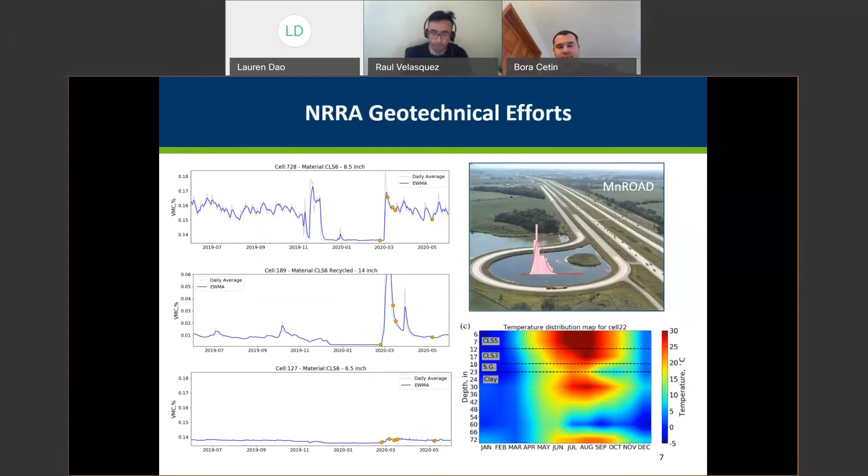So what is the motivation for this study?

The motivation of the study was mainly to improve and refine design guidelines and specifications related to recycled concrete aggregate and recycled asphalt pavements, refining the specifications related to recycled aggregate bases, and to test and monitor the performance of recycled aggregate bases under unique environmental conditions at MnROAD.

By unique environmental conditions, we mean these materials are subjected, as you know if you live in this region, to extreme fluctuations of temperature that can provide significant information in terms of performance. It's also subjected to not just big changes in temperature, but also freeze-thaw cycles. And very importantly, we have a very shallow water table at this facility, which creates complex moisture distribution inside your pavement foundation. So that's a unique set of conditions for studying materials such as these recycled bases.

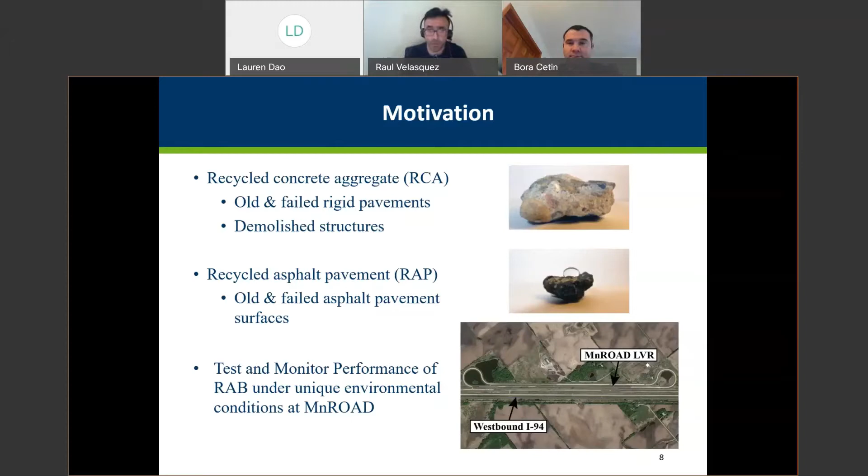The research team did a significant literature review and found there was limited information about field performance of these materials, and limited information about how to properly mix recycled concrete aggregate and RAP. That was an additional motivation to perform this study. There was inconsistent design methods and construction specifications related to recycled aggregate bases, and a lack of information available for design inputs.

Another important outcome from this work is the prediction of mechanistic-based parameters for design purposes based on simple experiments. Bora is going to talk a little bit more about that, how to predict stiffness based on simple testing. That's one of the outcomes from this project.

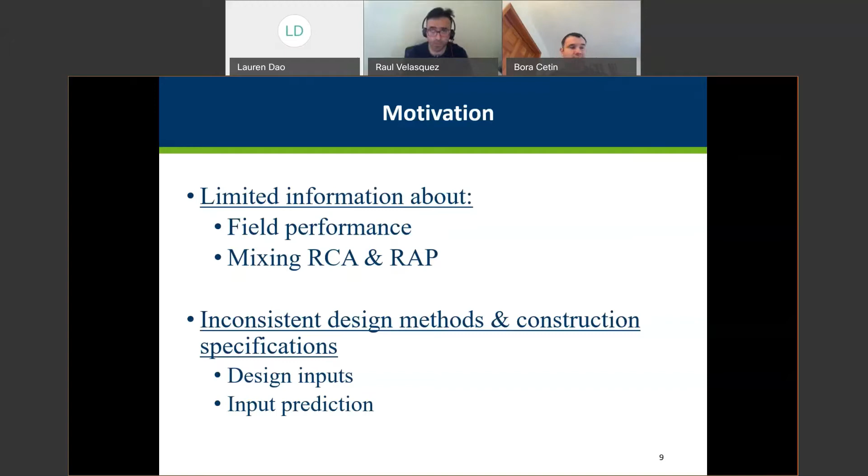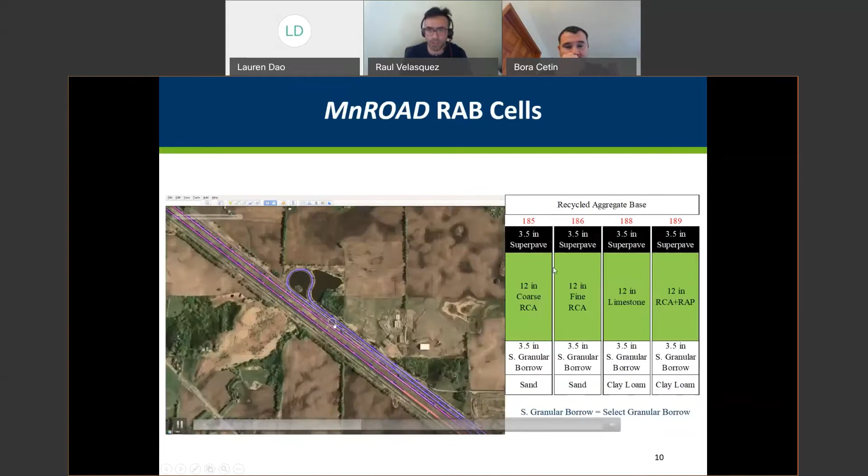So what are the MnROAD recycled aggregate base cells? Our cells are 185, 186, 188, and 189. The cells are located in the low volume road loop on the west side. 185 and 186 are founded on sand subgrade. 188 and 189 are founded on clay loam subgrade. So keep that in mind.

In terms of thicknesses, they're all the same. The top material is the same: a 3.5-inch Superpave mix design, 12.5 maximum aggregate size mix. 185 and 186 are the recycled concrete aggregate bases, one coarse material, 186 finer. 188 is the control section with limestone aggregate. And 189 is a mix of recycled concrete aggregate and RAP. We can talk more about the performance and the approximate ratio of these two materials later in the presentation.

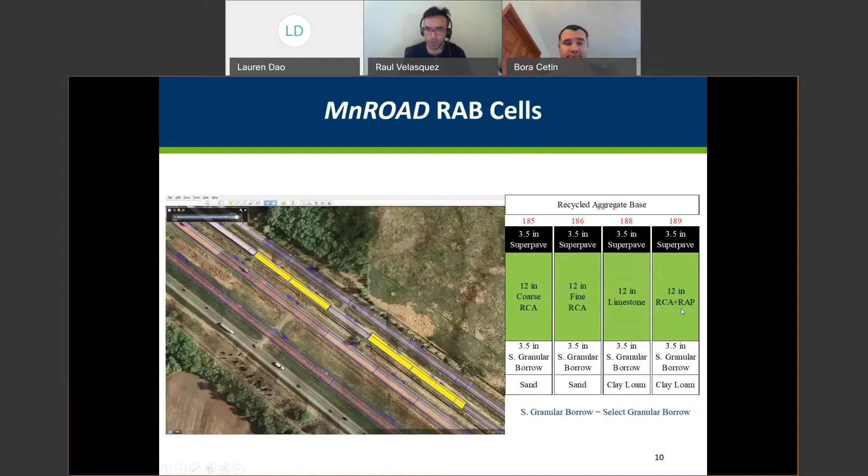Thank you, Raul. So thank you again, everybody, for being here. These are the nine different materials that we tested for the recycled base test sections at MnROAD that Raul just mentioned.

Again, we had a sand subgrade underneath coarse RCA and fine RCA test sections, and clay subgrade, clay loam, on the RCA-RAP mixture base and the limestone base. We have a select Granular Borrow material on the top, right above the sand and clay subgrades. And here are some pictures of the coarse RCA, fine RCA, RCA-RAP mixtures, and limestone.

One thing we also wanted to touch base with is the Class 6 aggregates and Class 5Q aggregates that are used as a base on top of another large stone subbase section. We're not going to cover those here, but we'd like to discuss those materials' characteristics in this presentation and how their performance compares to recycled bases.

Here is the limestone, as you can see, a very fresh crushed aggregate from the quarry. Class 6 and Class 5Q aggregates are basically a mix of RCA and RAP materials. As you can see from the figure on the bottom left, the Class 6 aggregate is very dark, and you can even see the black dot particles there - those are basically RAP materials. Class 6 aggregate actually had even more RAP material than RCA-RAP mixtures, based on one of the RAP binder content measurements. On the other hand, Class 5Q aggregate at the bottom of the picture is very whitish, similar to coarse RCA and fine RCA, and didn't have much RAP material. Even the smell of the Class 5Q aggregates was very intense - the cement smell you could take in when you opened the buckets where we store these materials.

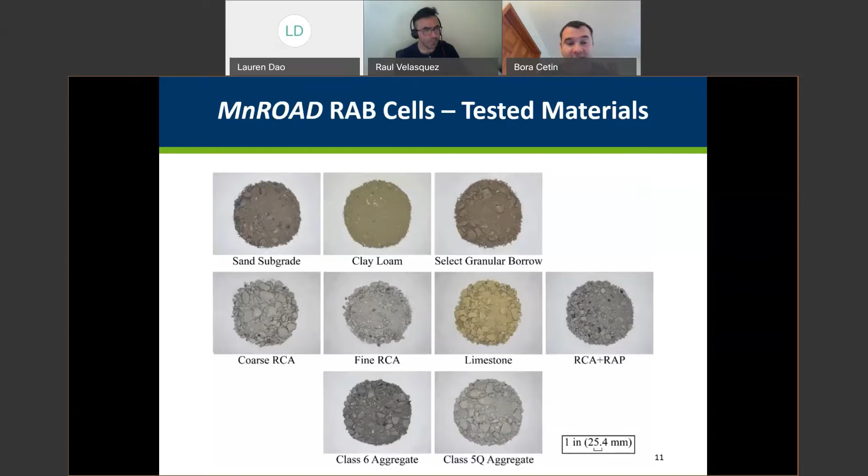So basically all these materials, except limestone and of course the subbase and subgrade layers, were recycled base materials. That's why we compare these materials' characteristics. Next slide, Rob.

These are very important, and as Raul mentioned, we tried to use these index properties to develop correlation equations, relationship equations to predict the resilient modulus or shear strength of the materials using some of these simple index properties, so agencies, contractors, or industry personnel didn't have to run resilient modulus tests to use as input in the pavement ME analysis.

And then saturated and unsaturated properties become very crucial. We wanted to know how the permeability of recycled bases compared to limestone. We also did a very unique study that not many people did, trying to understand unsaturated soil conditions and how they impact the performance of these materials.

We tried to get angularity measurements of these materials, to see if they change within the materials, using stereophotography, and also tried to determine the particle size distribution and shape characteristics. We won't talk much about this in this presentation, but I can tell you that the angularity of all materials was very similar to each other.

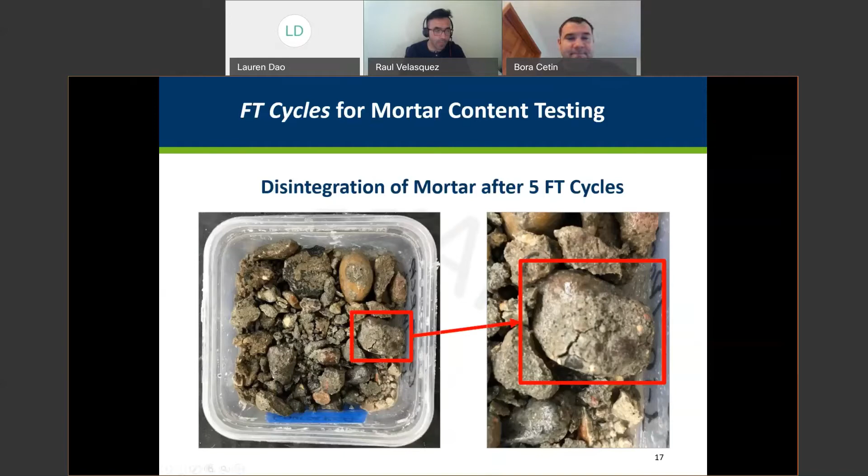So now let's switch gears a little bit. Let's move into, as Bora mentioned, the field performance at MnROAD.

Before and during construction, we performed extensive testing of these recycled aggregate base cells, which included in situ density and moisture content measurements using traditional methods like the nuclear gauge, spot testing, and sample collection. We also did DCP testing for shear strength and stiffness estimation, lightweight deflectometer testing, intelligent compaction by Ingios and David White, and falling weight deflectometer tests as well.

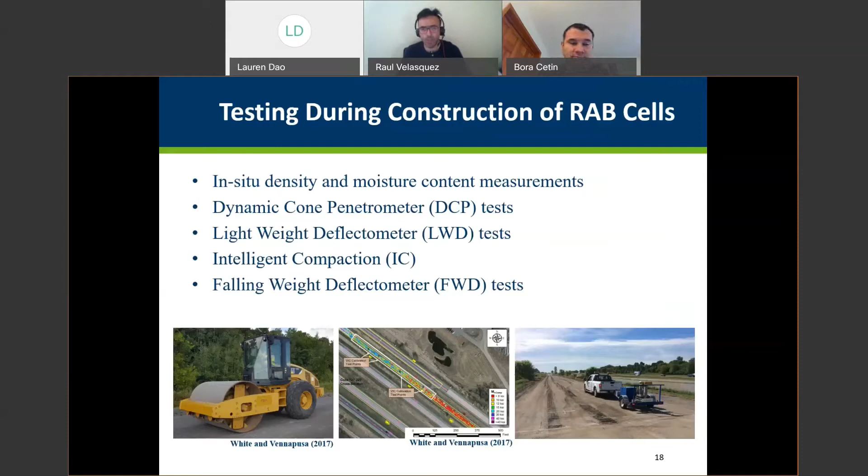So here I'm going to show some of the results that we got from during construction. Here we're showing the LWD stiffness for those 4 recycled aggregate base cells.

Overall, stiffness are very similar for all 4 bases. It varies between 10 to 15 KSI. In general, the coarse and fine RCA shows slightly higher stiffness than the limestone and the mix of RCA and RAP, with the one with RAP showing the lowest. There could be many reasons why we see this trend, and we will discuss that later on during this presentation.

For FWD, the trends were very similar. Again, the RCA bases were showing higher stiffness than the ones with the limestone and the RAP material.

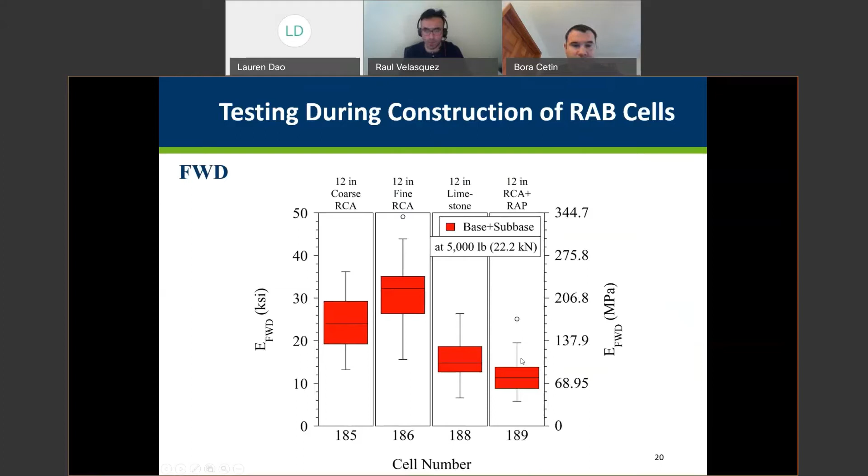In terms of performance monitoring, we continually measure soil temperature and moisture. And from those measurements, those profiles, the team estimated frost penetration depths, freeze-thaw periods, and freeze-thaw cycles to determine the performance of these materials under extreme environmental conditions.

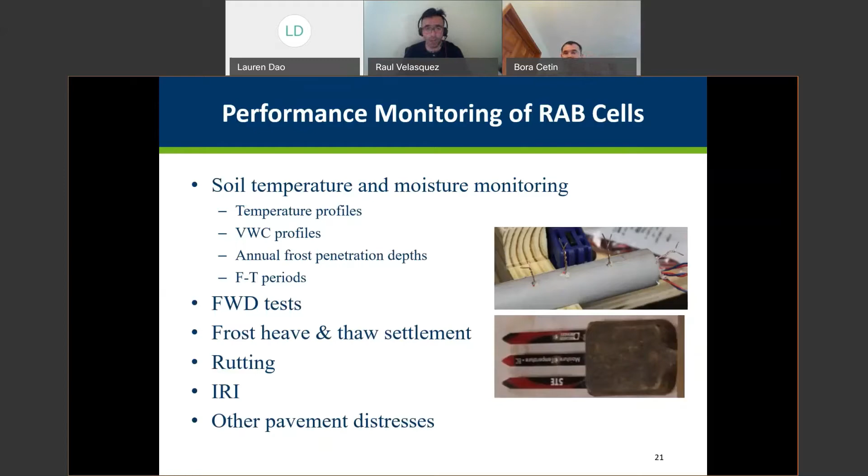MnROAD operations also did very nice work helping us out with FWD testing, frost heave and thaw settlement measurements, very accurate actually, rutting, roughness, and other pavement distresses.

This is how the typical instrumentation for these recycled aggregate base cells look like. Kudos to Len and all the people at MnROAD for doing an outstanding job instrumenting these cells.

Typically, for this experiment, we have 12 thermocouples across the pavement foundation, and then 4 moisture sensors, including sensors in the base, in the subbase, and in the subgrade.

Just so people not familiar with MnROAD know, we have an outside lane which we call the environmental lane, where we study the environmental effects, where we have the instrumentation and occasional traffic, and then the main traffic is in the inside lane, just FYI.

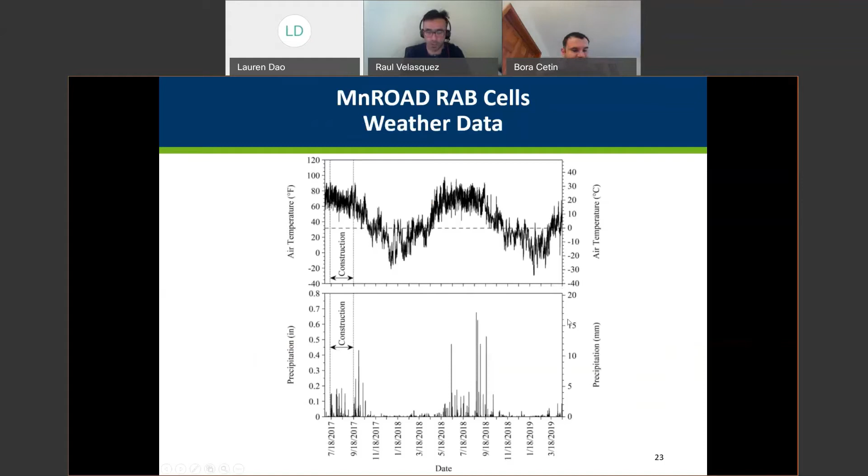We also collected weather information for our analysis, air temperature, precipitation, solar radiation, and wind speed in a nearby station.

So I'm going to show you some early pavement distress data. As Bora mentioned, we collected about 2 to 3 years of performance of these cells.

In terms of rutting, in general, all the cells are performing well, with very little distress. We have less than 0.2 inches, very little difference between them. Perhaps the RCA cells show slightly lower rutting.

In terms of roughness, they're all below the target limit, and they're pretty similar. Longitudinal cracking was not observed for the first 2 years.

Here's some nice survey data from Mike and people at MnROAD. Thank you for doing all this work.

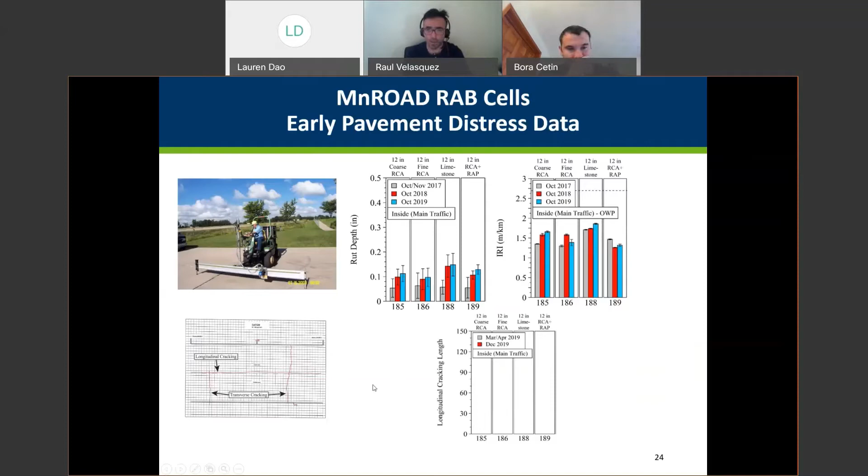An interesting observation we got is in terms of transverse cracking. Early on, after 2 years of material being in place, we observed some transverse cracking in cell 189, which is the one with a mix of RCA and RAP. No transverse cracking was measured for the other cells.

Looking back at the intelligent compaction quality data collected from David White and Ingios during construction on both the subgrade and the base material, we observed that the cells with more uniformity and less spatial variability were the ones where we currently don't observe transverse cracking.

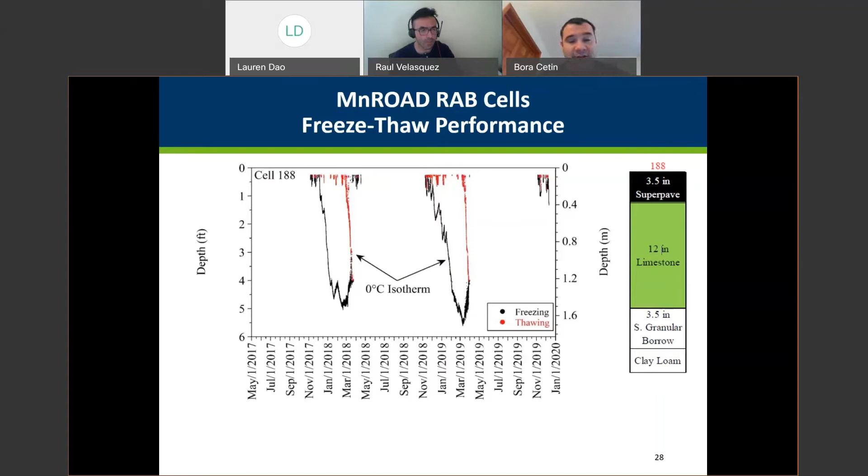Next slide please. And here again, 0 degree Celsius isotherms, and here we kind of determine what is the maximum frost penetration depth and what is the freezing period for each material, and the thawing period for each material, and determine which material takes longer to freeze and which material takes longer to thaw, which is very important.

And we kind of summarize these for each year for each recycled base layer here. As you can see, the thawing periods were higher for RCA, so it takes a little bit more time for RCA materials to thaw completely.

And this is related to two things. Of course, the first thing is thermal conductivity - we hope that in future studies this will be measured for these materials. But what the current data shows us is that absorption data is very important.

The higher the absorption of your material, the more water it will absorb and keep, which will turn into more ice, forming more ice. And of course, that higher rate of ice content will take more time to thaw. That's why we see higher thawing periods for RCAs compared to 12-inch thick limestone materials.

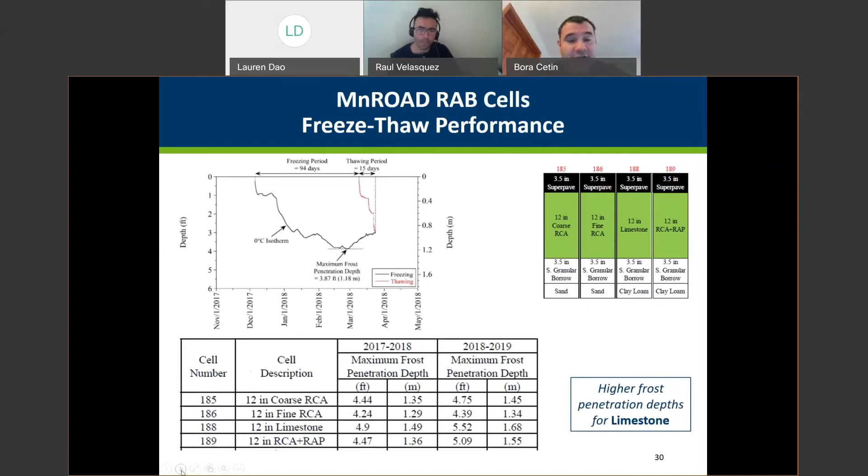One thing that we see is higher frost penetration depths for limestone, and this can be attributed to absorption and thermal conductivity. Lower absorption means low amount of water is held in limestone. It has very low absorption value, so it allows water to penetrate much easily and start freezing at higher depths. Comparing frost penetration depths, they are not that significantly different, 20 to 30 centimeters, depending on materials. But thermal conductivity is a key point, and absorption characteristics have an impact on frost penetration depth.

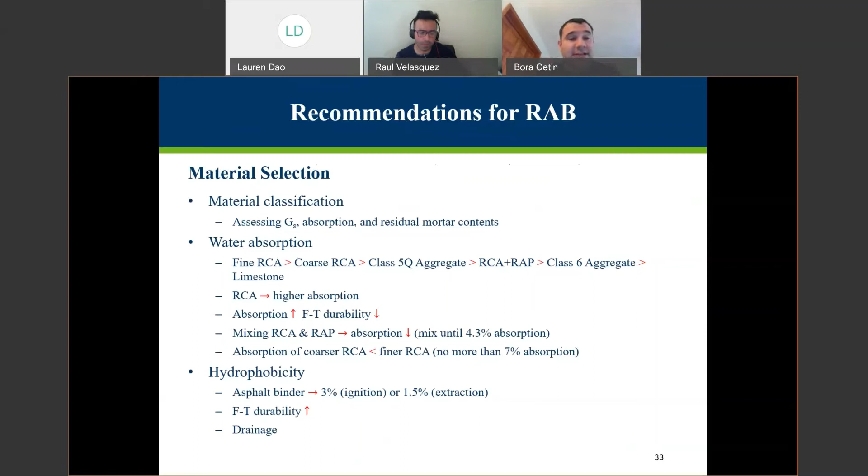One thing with the RCA materials is the calcite precipitation issue, which may cause some drainage issues, and I'll talk about that in the next few slides. Also, RCAs seem to have higher absorption, so it's recommended that gradation after compaction needs to be looked at.

For coarser RCA, maybe use a little lower degree of compaction. Permeability-wise, overall, at the moment, field and laboratory permeability test results show that the hydraulic conductivity of RCA seems to be higher than limestone. But of course, long-term performance needs to be checked in future studies.

We also looked into recycled aggregate base layer design, running some Pavement ME simulations—pavement mechanistic-empirical design simulations—to check whether using RCA materials or RCA-RAP mixtures at a lower thickness would give us the same performance as a 12-inch thick limestone base.

The results were yes. There are some simulations we ran—you can get the stiffness performance of the material, the overall pavement performance prediction, by using 4 inches of some of these materials instead of 12 inches of limestone base. Of course, this is just a simulation, so it needs to be verified in field studies, but based on this Pavement ME analysis, you can significantly decrease the thickness of the base layer if you use RAB material compared to using freshly crushed quarry aggregate base materials.

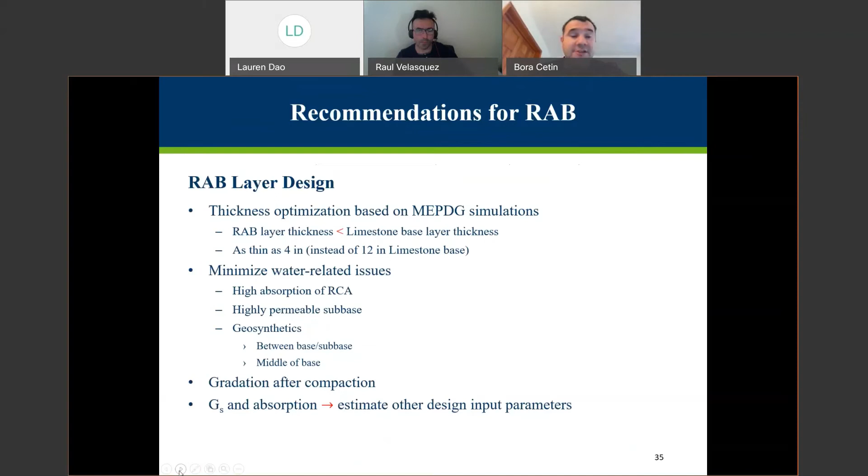So what are the environmental aspects of recycled aggregate bases? It wasn't part of this study, but we wanted to touch base on this. We have quite a bit of experience with this and wanted to summarize the last 10 years of studies we've done on this topic.

Leachate pH of the RAB layer changes from pH of 11 to 12. Some of our studies show that addition of RAP may reduce this pH slightly, but not significantly; mixing RCA with conventional aggregates decreases that value a little, but not significantly. For carbonation, we exposed these RCAs to carbonation, which tends to decrease the pH of these materials significantly, almost 2 to 3 magnitudes.

And this happens in the field too. When you put the RAB layer there, over time it will carbonate it and the pH of the RAB material itself will decrease. But the main thing, and this is no concern at all, you have a sub-base or some sort of subgrade under the RAB layer.

Whatever leaches from the base layer goes to the sub-base, and our research studies show that once that leachate from the recycled aggregate base layer leaches through the sub-base or subgrade, your effluent pH beneath that sub-base or subgrade is 7.5 to 8.5, even lower than that. So in terms of environmental concerns, high pH is not really a concern, because the sub-base and subgrade layers underneath the RAB layer disperse and dissipate that high pH value within itself.

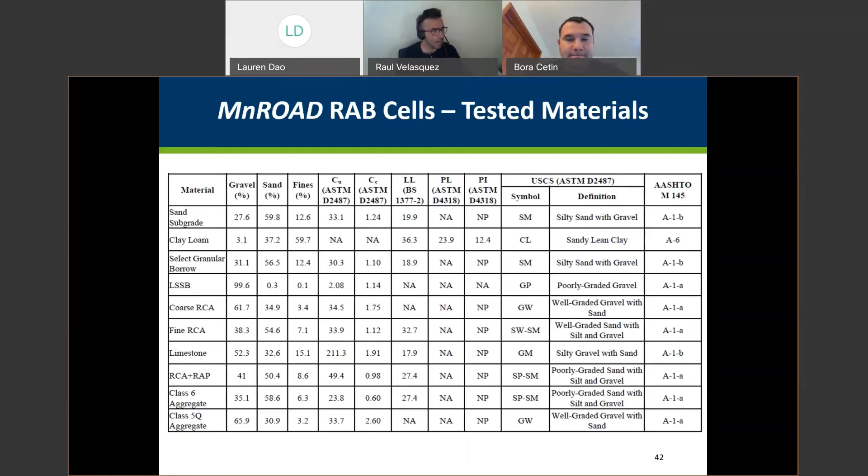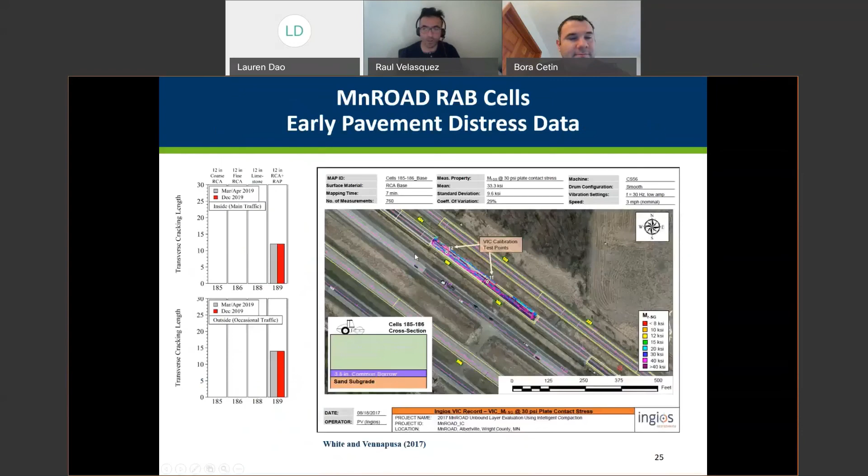Related to slide 26: why is the moisture content at 14 inches lower than the moisture content at 5 inches? Slide number 26.

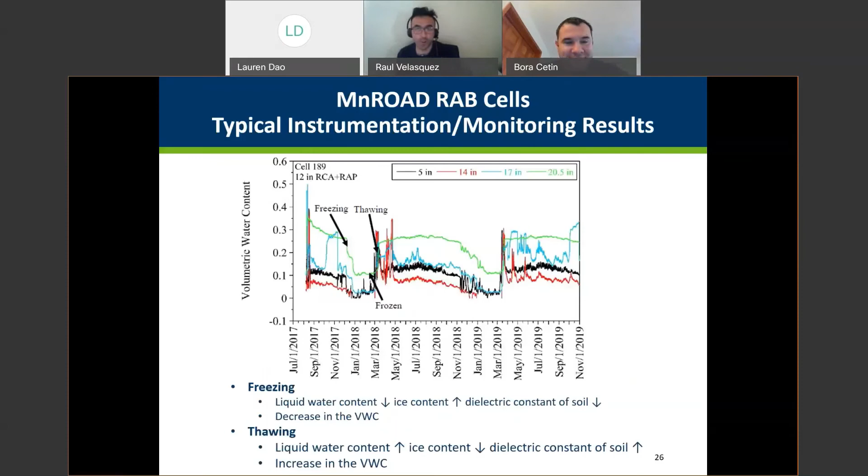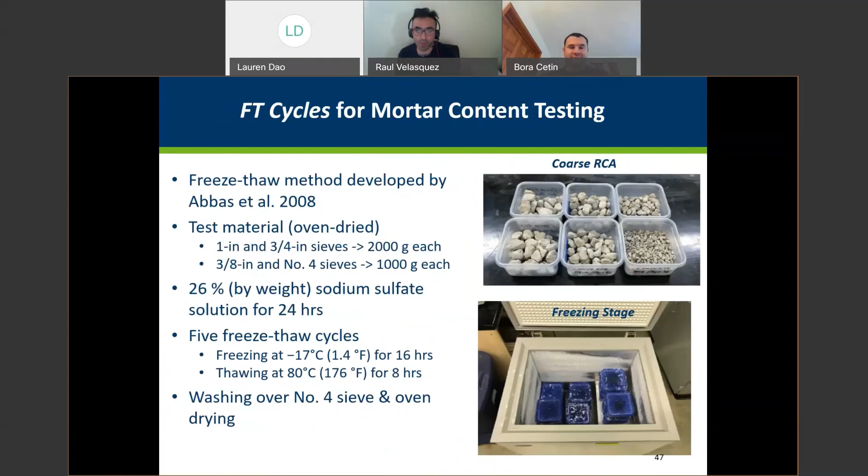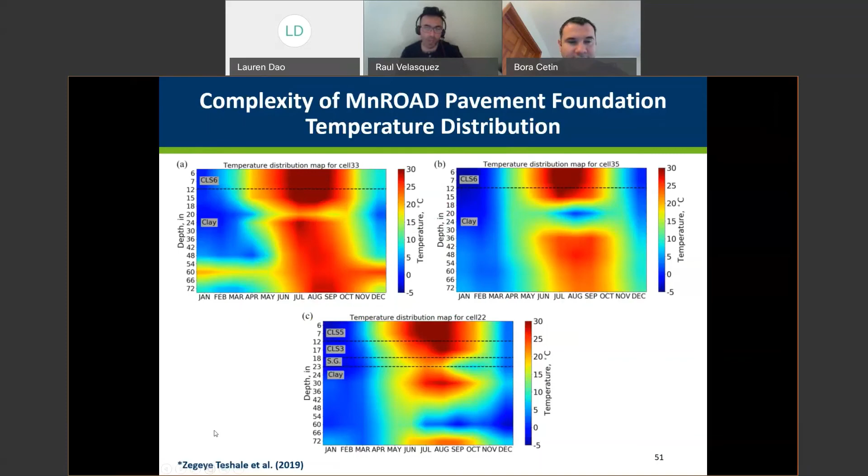This is something we're still working on. MnROAD research and the Office of Materials and Road Research are working quite a bit on that complex moisture distribution. I want to show some plots from work done by Dr. Zegeye Teshale on this question, due to the fact that we have precipitation plus a shallow water table. Here I'm showing temperature distribution, and here moisture - how it changes along a typical cross section in MnROAD with the seasons. We have a very complex boundary condition because the water table is very shallow, about 5 feet, varying between 3 to 5 feet depending on location in MnROAD. Some of the subgrade is sand and clay, which can hold way more water and raise the water table. Coupled with precipitation, this gives us difficult distribution profiles that are usually not homogeneous - not what we'd expect when analyzing the data. We're working on it, starting to install more groundwater monitoring wells, trying to understand, based on performance data and measurement of the soil water characteristic curve, why we have this flow regime and unsaturated behavior change. It's a very good question and we're working on it. We don't have a clear answer right now, we're gathering all the information. We just acknowledge how difficult it is due to this environmental condition and the shallow groundwater table location at MnROAD.

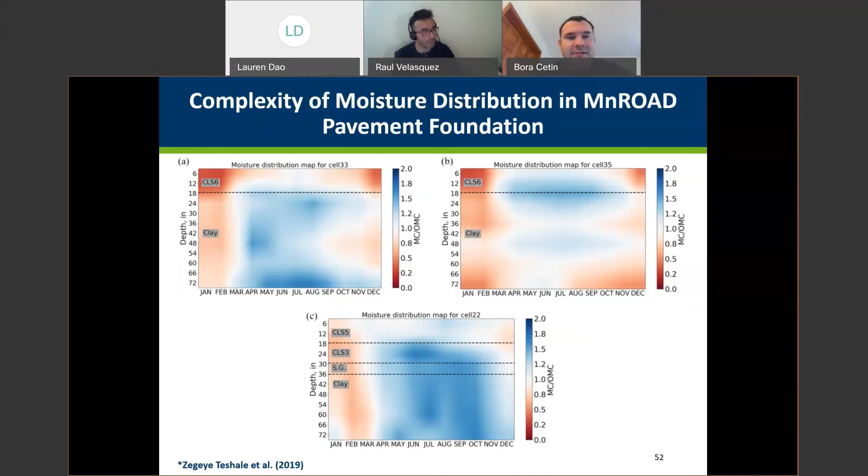What version of Pavement ME was used in the study? We used the national calibrated values. It was the version right before the last updated one - I don't remember the exact version number, but it's the previous most updated one. The pavement ME study was really just to do a preliminary, though extensive, check to see how the base layer thickness values may change.